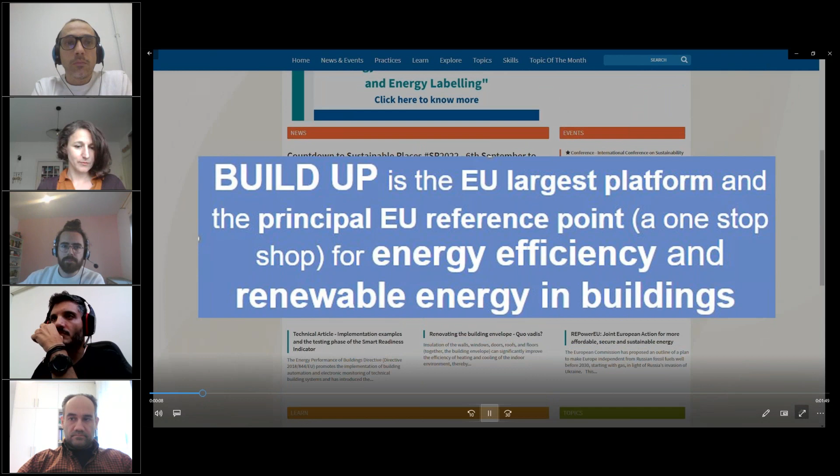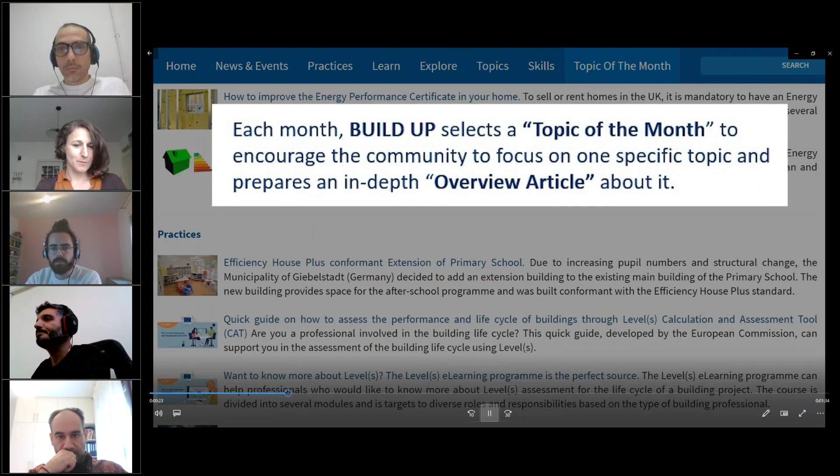BuildUp is Europe's largest international portal for energy efficiency and renewable energy in buildings. It is a unique community that provides the opportunity to discuss, contribute, and collaborate with other experts in this field. BuildUp aims to bring together stakeholders working in the building sector to reap collective intelligence about energy reduction by encouraging knowledge exchange. Our editorial work is organized around the topic of the month, which allows us to go deeper into a specific theme. Each month, several items are produced as overview and technical articles and infographics, but not exclusively.

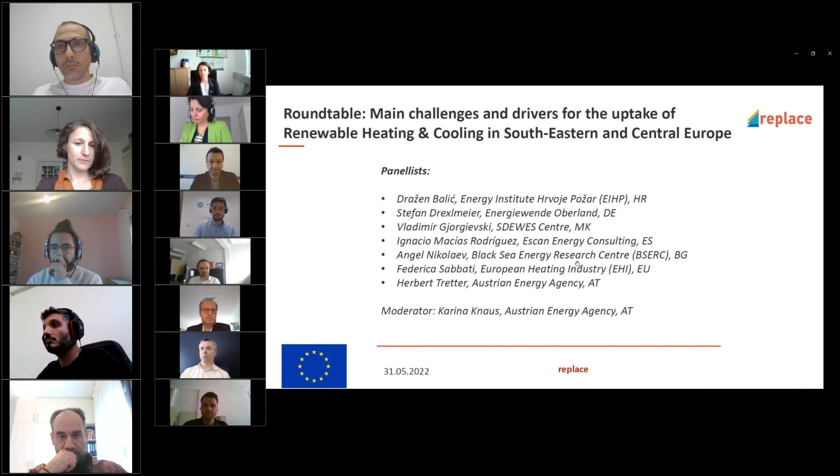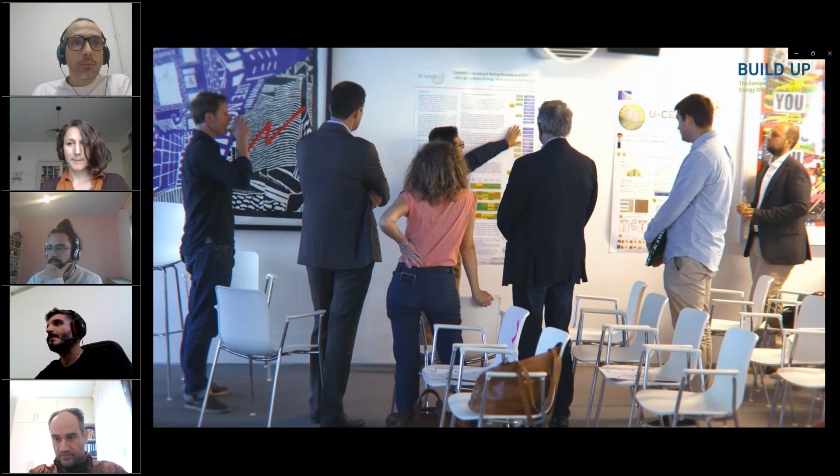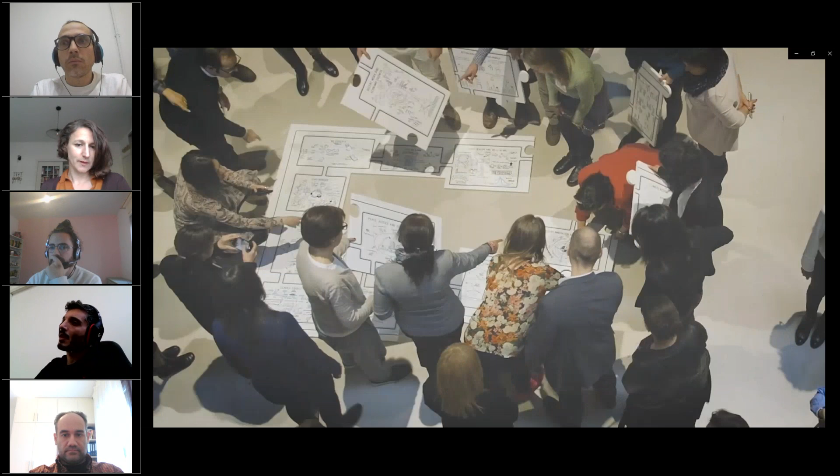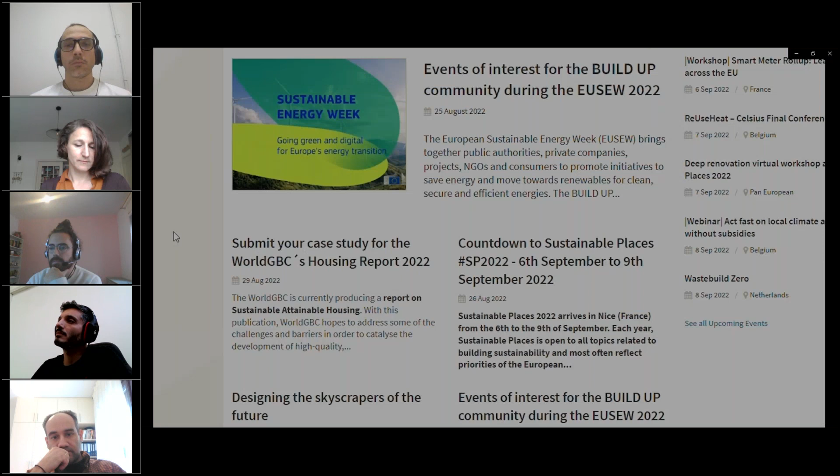BuildUp also offers the opportunity to host webinars on all the topics related to energy efficiency. More recently, BuildUp has opened the opportunity to distinguished experts in the field to share their knowledge in front of our cameras in the BuildUp Expert Talks. BuildUp portal shares daily the most relevant events in the field of energy efficiency and renewable energy, but also participates actively in many European events around the year as EPB Center and REHVA conferences, Horizon 2020, Interreg, and COST Action events, Covenant of Mayors, and much more, with the aim of further disseminating the results and helping to create high-quality media content. BuildUp content is updated daily, reaching around 120 items each month.

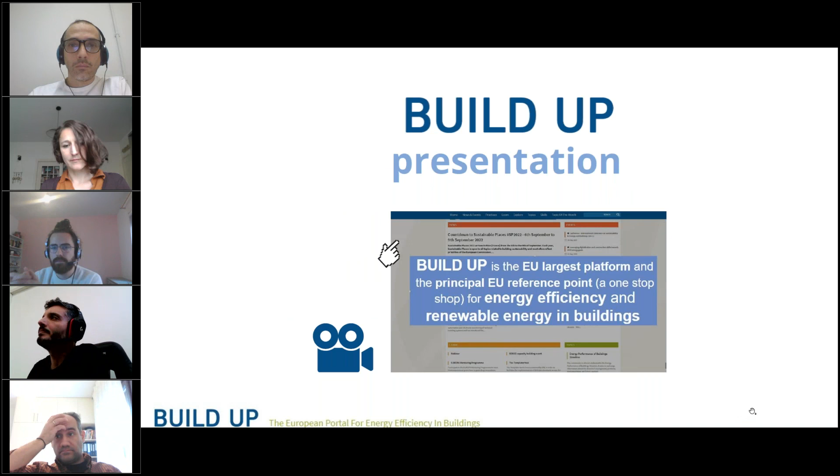It is a pleasure to host today's webinar entitled The Plug-n-Harvest Solution Enabling Smart Energy Renovations for Different Building Cases, which is organized by the Plug-n-Harvest project. In today's agenda, Dr. Iakovos Michailidis, electrical engineer and technical manager of Plug-n-Harvest at Center for Research and Technology Hellas, CERTH, will present the plug-and-play passive and active multimodal energy harvesting systems, circular economy by design with high replicability for self-sufficient districts near zero buildings. Tony Gerena, business and energy analyst at IWASOL, will present the circular economy aspects of the design. Neil Juvanteni, industrial engineer at Housing Agency of Catalonia, will present the pilot case 3, that is the Sant Quirze residential building in Catalonia, in Spain.

The final presentation will be from Dr. Nikolaos Margaritis, mechanical engineer and project manager at Center for Research and Technology Hellas. He will present the pilot case 4, that is the RWM Grevena tertiary building in Greece. The audience is welcome to send us questions through the platform. These questions will be answered at the end of the presentations in a session moderated by Susanna Prochaskova, Innovation Architect at Pitch Architects. I leave the floor now to our first speaker, Dr. Iakovos Michailidis, who will present the Plug-n-Harvest project. Thank you very much and enjoy.

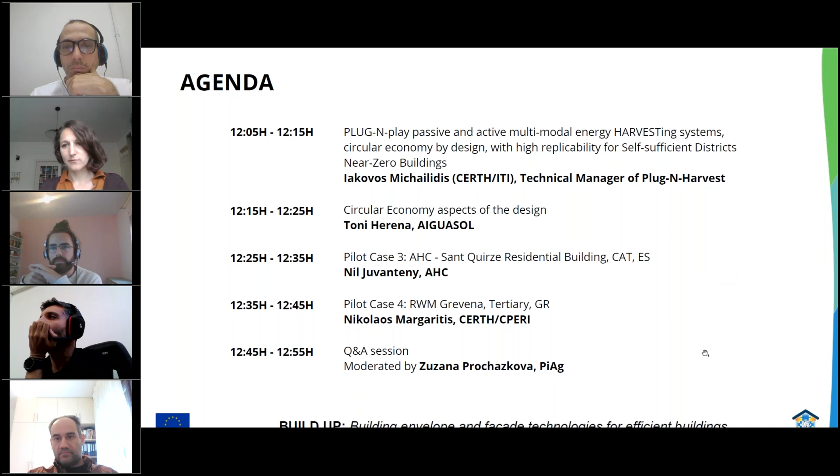So my name is Iakovos Michailidis. I'm a postdoctoral research associate in the Information Technologies Institute, which is under the Center for Research and Technology Hellas. And CERTH is the coordinator of the project, and I'm mainly involved in the technical management of the project itself. I will do the introductory part to present the general idea of the project, and then we will move on with my colleagues and the next speakers.

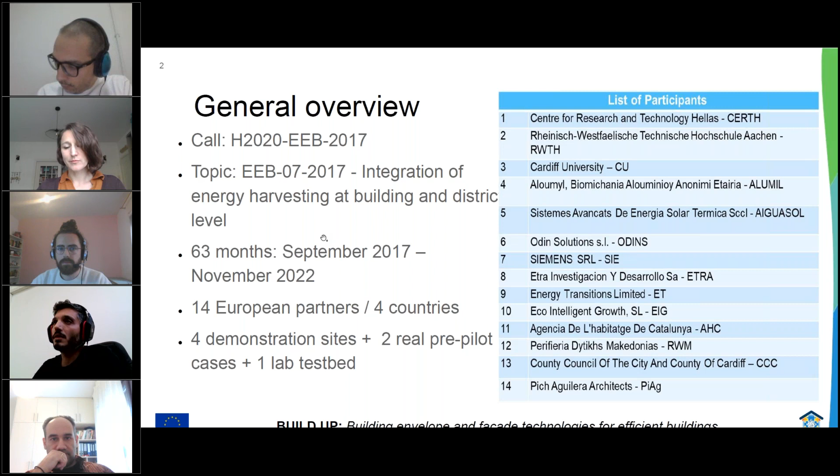So, as a general overview, Plug-n-Harvest is a Horizon 2020 project funded under Energy Efficiency in Buildings 07-2017 topic. It started actually in September 2017. It went through COVID and eventually managed to complete and finish in November 2022, actually quite a few weeks ago. The consortium consists of 14 partners coming from 4 EU countries.

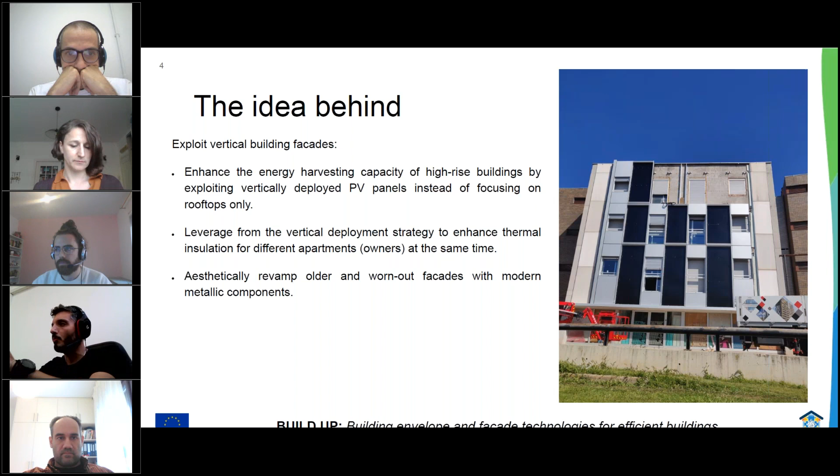The main objective now of the project, moving on from the idea, is to develop a modular smart facade system that can be easily adapted to the different building cases and requirements to move them one step closer to energy neutrality. The facade system should be able to ensure low installation costs.

These are the goals of the project. Circularity through reusable parts, components and elements. Energy harvesting through PVs, as an example, and structural resiliency through innovative aluminum profiles, which are able to withstand much heavier technology loads than conventional ones, which may host only, for example, panels.

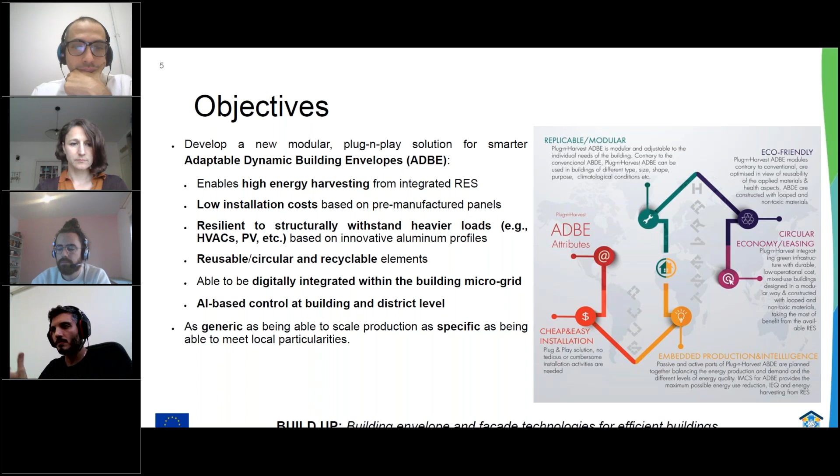Moreover, since conventional insulation and technology infrastructure elements are not capable of guaranteeing energy efficiency on their own, smart ICT solutions are necessary to manage controllable elements appropriately. So the first pillar is the modular facade, and the second pillar is the intelligence part, the AI part. Plug-n-Harvest tries to marry these two in order to provide capacity to the building and exploit the capacity that is installed on the building through AI.

Now, the quantified goals of the project. It's to ensure installation costs 20% less than conventional energy retrofitting solutions when in production scale, of course, not as a prototype. Reduce energy bills up to 30%, maximize exploitation of locally harvested energy up to 80%, and of course, ensure the acceptance of end users by over 90%.

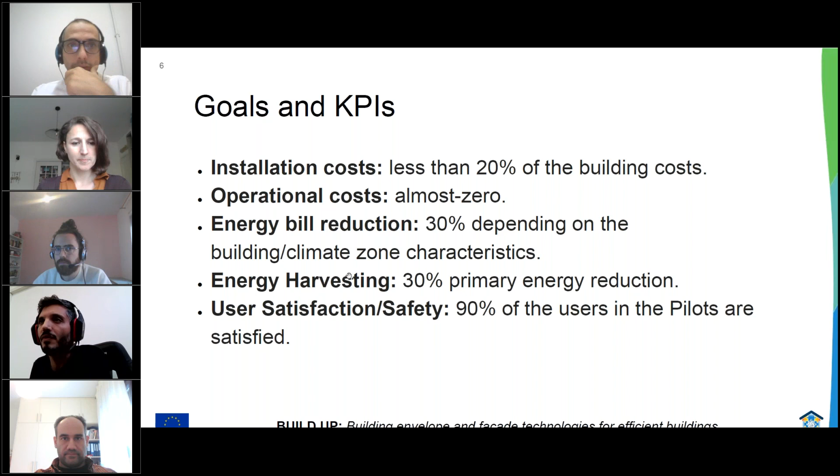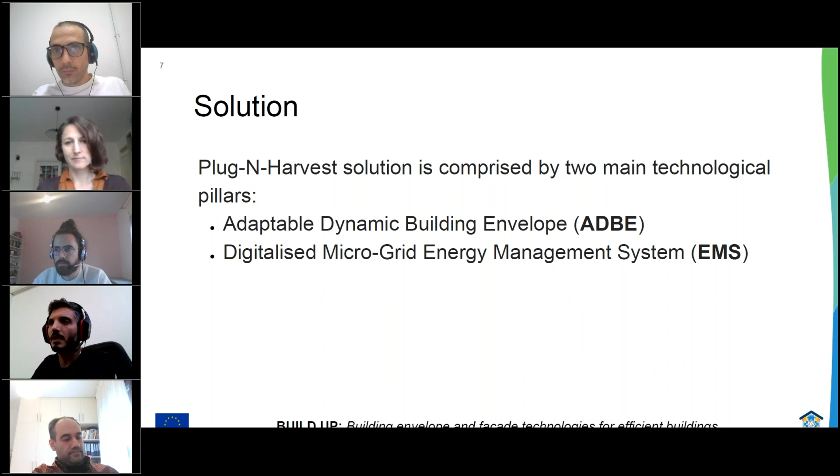As implied already, the Plug-n-Harvest solution consists of two main pillars: the facade and the digitalized part, the AI part. The facade part has been designed to host detachable aluminum panels that can be easily configured to integrate both passive insulation materials, like stone wool, as well as active technology elements for energy harvesting and demand reduction, like PV panels or even HVACs or heat recovery systems, as an idea.

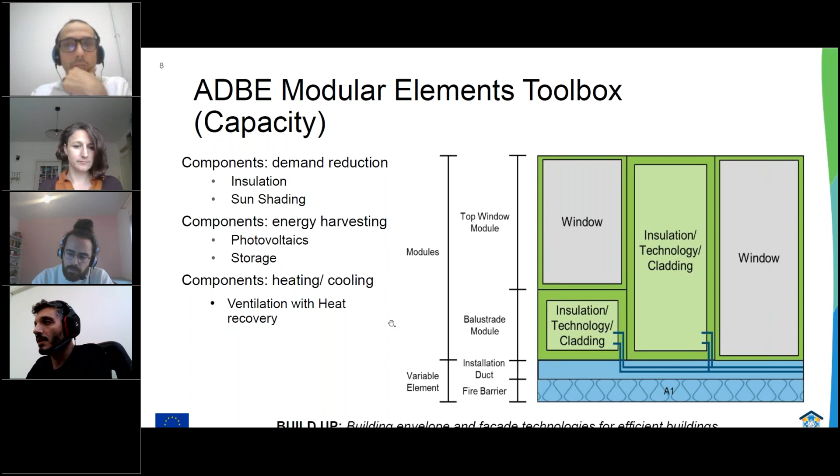About the ICT part now, the second pillar of the project. It's comprised of an ecosystem of different tools. On your right-hand side, you may consider the building itself, coupled with the ADBE facade. Now starts the digital part. We have the sensors and the actuators that allow us to control the facade together with the other available loads, the existing loads of the building, of the microgrid.

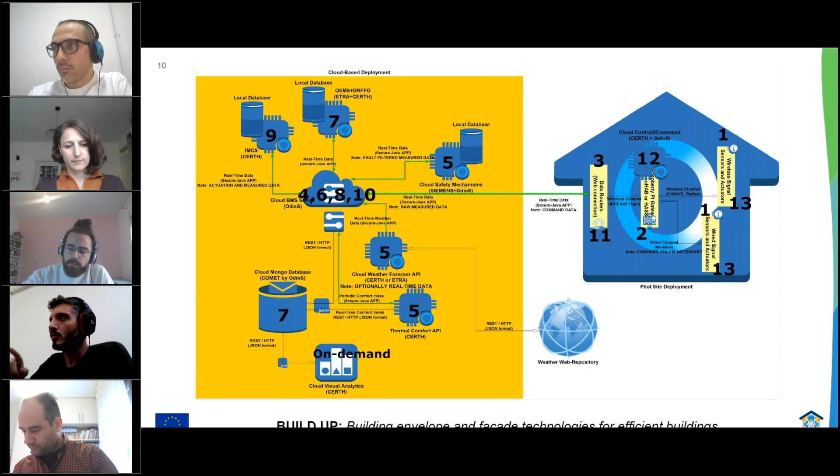Then we move on to flexibility forecasting at the district scale, and eventually there is the heart, the core ingredient of the ICT ecosystem, the energy management tool, the intelligent management and control system, which takes into account the flexibility forecasting as well as the curated data in order to generate optimized control decisions and actuation signals for the building and the microgrid controllable loads to close the control loop.

Now, to conclude, Plug-n-Harvest includes real-life experimenting with 2 pre-pilot sites, one in Thessaloniki, Greece, at CERTH, and another at Cardiff University in Wales. And 4 real-life large-scale demonstration sites.

2 of them are residential: a multi-family building in St. Quirze, Barcelona, Spain, and 2 single-family houses in Cardiff, Wales. The other 2 are tertiary office buildings, one in the Region of Western Macedonia in Grevena, Greece, and the last one on the RWTH Aachen University campus in Germany.

Today we will focus on the outcomes from the Plug-n-Harvest solution implementation in the 2 largest pilot cases, the one in Spain and the one in Greece. However, before that, I give the floor to my colleague, Tony Herena from Aiguasol, who will present the circularity aspects that we considered for the project designs and solutions.

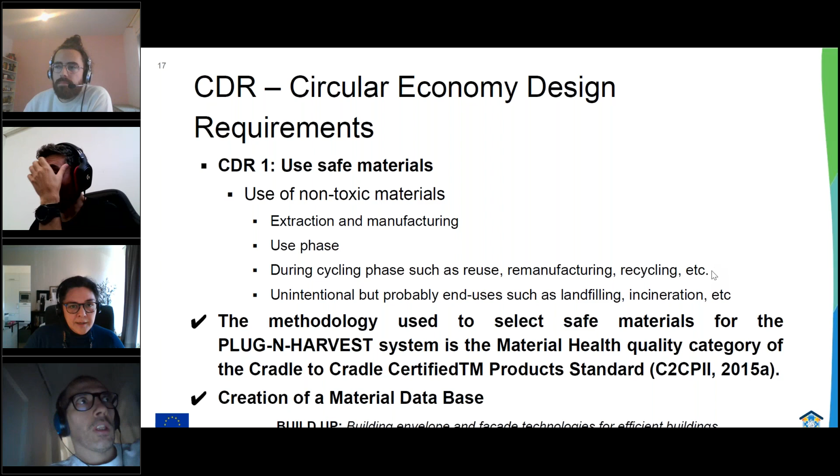Hello? Tony, I think we have lost your connection. Tony, if you'd like to help your connection, just disable your camera to save some bandwidth. Your connection is a little bit weak, and we have not heard you. Do you hear us? Do you hear us, Tony? If you are having any troubles, we can pass to Neil. Exactly. Maria, could you pass the controls to Neil while Tony searches for a better place? Yes, hello.

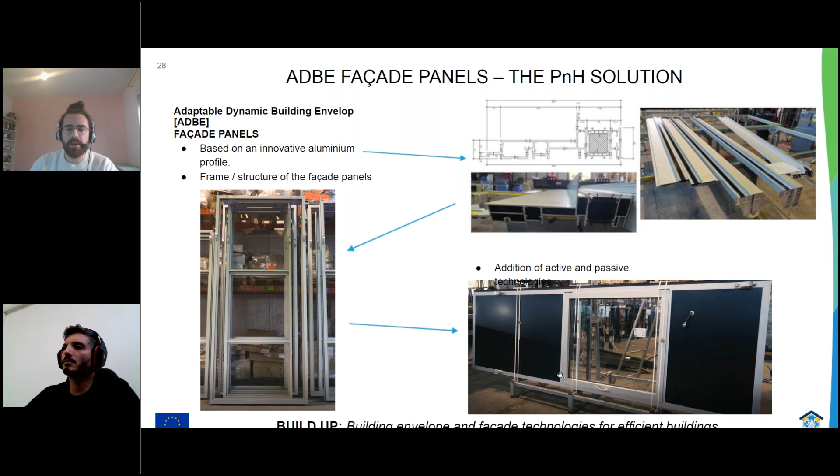Finally, from those profiles, we construct the frame or the structure of the panels, and from that we can add several active or passive technologies to the profile in order to get the final result. In the case of St. Quirze, we have incorporated several passive and active technologies.

In this case, we have 10 centimeters of thermal insulation of mineral wool. We have also installed new high-performance windows, which include aluminum frame with thermal bridge break, double glazed windows with argon gas gap in the middle, and shutters of anodized aluminum. Then we have also incorporated photovoltaic panels, which are tailored ones. And finally, in the areas where there are no windows and no PVs, we have installed aluminum cladding.

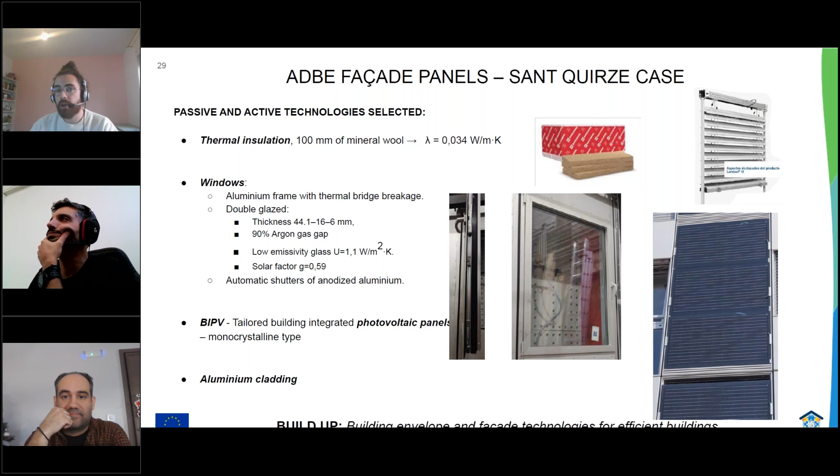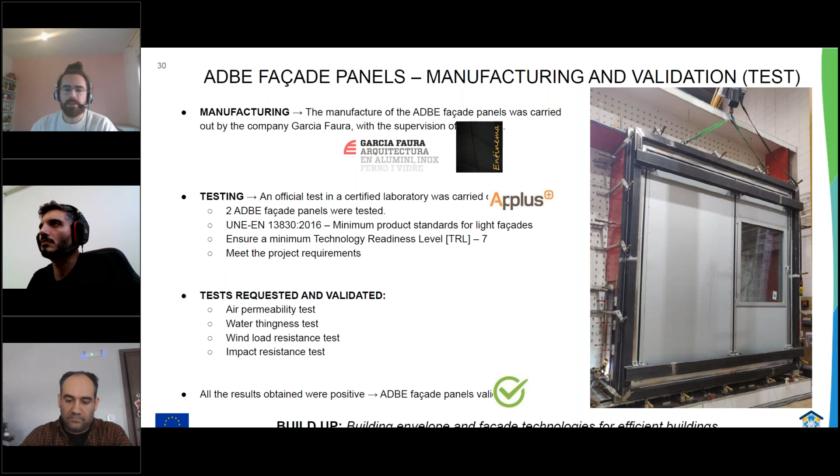In St. Quirze, we have installed a total of 21 ADBE facade panels. These were divided in 3 rows and 7 columns, and we have 3 different types of panels. The first one is what we call a single ADBE panel, because the panel is made of PV. Then we have the double ADBE panel, which has 2 different parts. In the lower part, there is a window, and in the upper part, there is aluminum cladding. And finally, the triple one, because in the upper and lower parts there is aluminum cladding, while in the middle there is a window. We have 9 units of the single panel and 6 units of both the double and triple ones.

Okay, let's go now through the renovation and the works done on site, especially focusing on the execution times, because reducing them was one of the objectives of the project. So the renovation started in March and lasted until May of this year, having a duration of less than 2 months. We have divided the whole process in 4 general steps in order to simplify it. The first one was obviously the dismantling of the existing facade, because it was not possible to install the panels over the ventilated facade. And this had a duration of 7 working days. In the picture, you can see the process of dismantling.

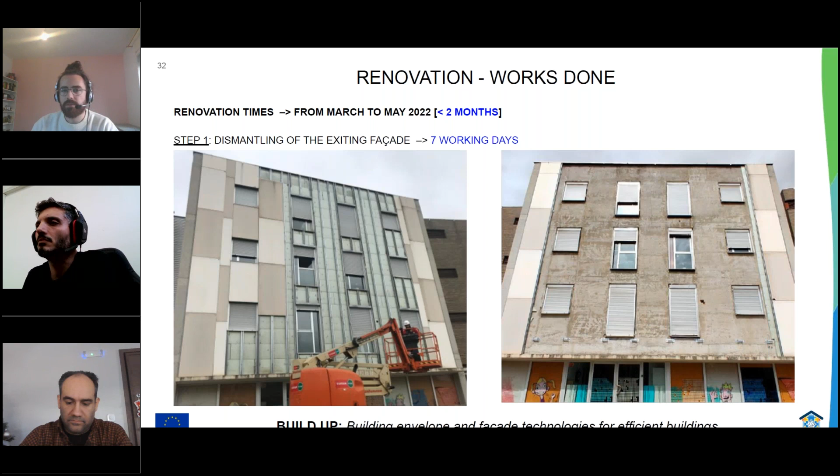Then the second step, with all the preparation works for the installation of the ADBE facade panels. These works were, for example, to install the anchoring system, to install the fire protection elements, to install an acoustic isolation band, or to drill the main wall in order to pass the wires of the automatic shutters, among others. All these works lasted 12 working days.

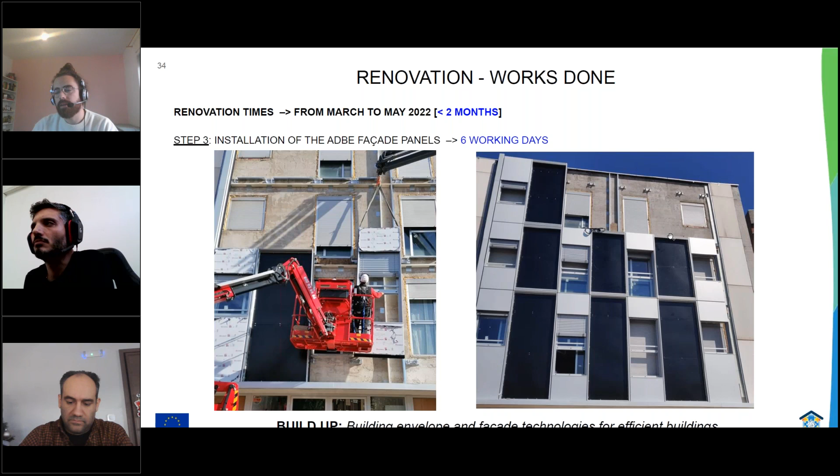And then, once the facade was prepared, we did the installation of the ADBE facade panels. It was very fast because it took just 6 working days, which, considering that we have 21 ADBE facade panels, is between 3 and 4 panels per day. And also, as you can see, there was no need for any type of scaffolding, and all the installation was done only with a lifting basket and a crane. Here you have the pictures. We started from the lower left corner, and the last one was the one in the upper right corner.

And finally, after the installation, the last step was the dismantling of the existing windows from the interior, and then some finishing works. These works took another 7 working days, and were, among others, to finish the internal frame of the windows, to seal some joints, the completion of the electrical circuit for the automatic shutters, and to finish the lateral or the crowning of the facade from the exterior.

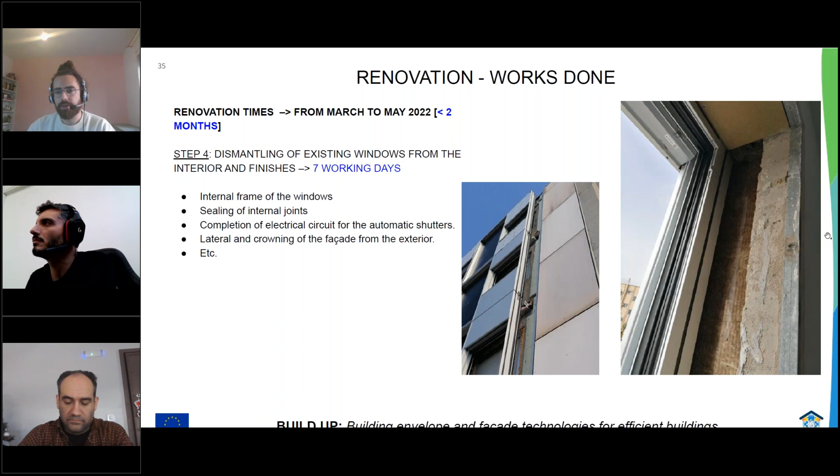About the PV system, we have installed 33 glasses within the 9 single ADBE panels that I have shown you, and the total peak power installed is 5.38 kilowatts peak. We have used an inverter of the brand Solis, and the nominal power is 6 kilowatts nominal. The system has been started up and legalized just 1 week ago. And the production is shared equally among all the dwellings, and the surplus of production, which is not consumed in the building, is injected to the grid and compensated through the electricity bills of the tenants.

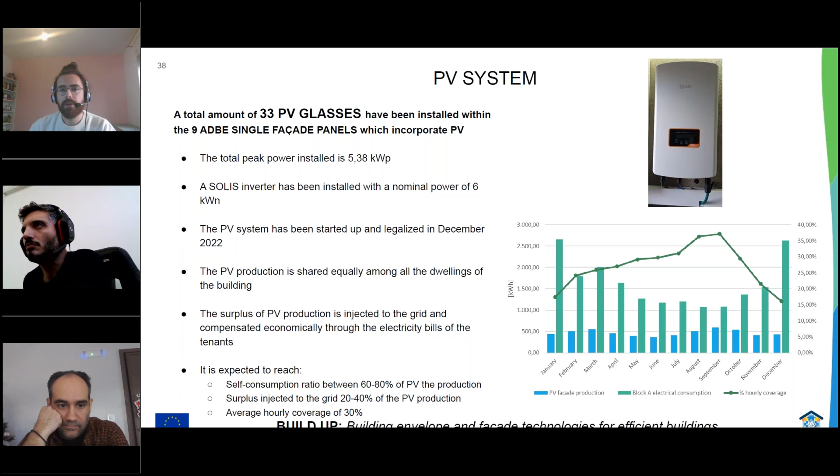As I said, we don't have enough real data yet, but it is expected to reach a self-consumption ratio between 60 and 80% of the PV production, which means that between 60 and 80% of the production will be consumed directly in the building, and the rest, the surplus, between 20 and 40%, will be injected to the grid and compensated. The average hourly coverage is expected to be around 30%, which means that of the total electricity consumption of the building in every hour, more or less 30% will be produced thanks to the PV system.

We have also incorporated PV, and thanks to that, as I have already said, we expect a 30% reduction of the electricity consumption from the grid, and also a 30% reduction of the non-renewable primary energy in the building. Also, there will be extra economic savings from surplus compensation through electricity bills. We have also been able to shorten the renovation time. We have taken advantage of the circular economy benefits that hopefully Tony will explain now.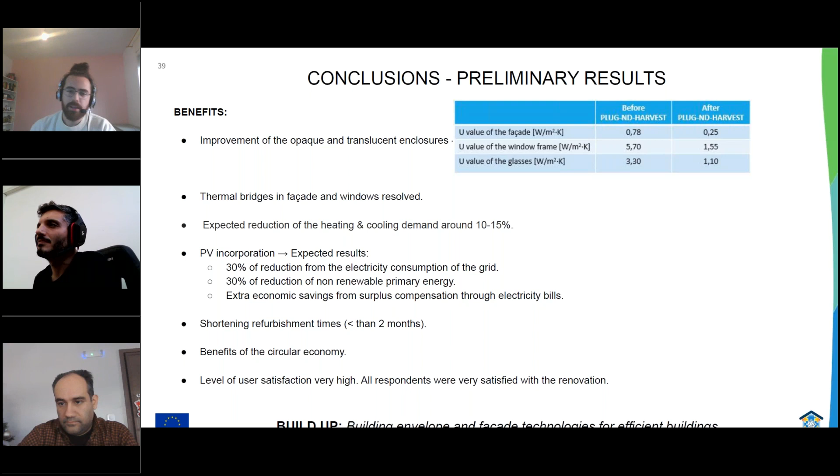And finally, we have done several surveys to the users in order to evaluate the degree of satisfaction. I have to say that the users are really satisfied. The level of satisfaction is very high. So is ours. So thank you very much for that.

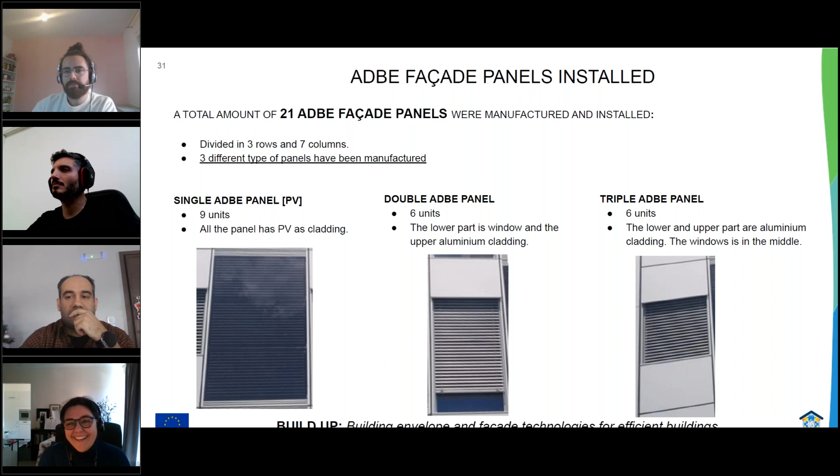Thank you so much for this detailed and pertinent description of the case study and the outcomes. That is, I think, what our audience is more interested in. We go back to Tony Erena. Hope you hear us. Perhaps you don't put the camera, just in case. Do whatever you feel better, and go back to understand the circular economy aspects of this design. The floor is yours. Thank you.

Okay, can you hear me now? Yes, absolutely. Okay, thank you very much. Sorry, sorry for what happened. I don't know if I can pass again the... It seems that yes. Okay, so this was already explained. Okay, so we will make this our back point.

So our goal in this Plug-n-Harvest was to design a modular ADBE solution. Maybe it was fine that Neil presented the visual solution of the ADBE, and then we come back to the circular economy or circular design benefits, because you already have that visual aspect of the final product that we are developing in Plug-n-Harvest. So our main goal was to design a modular ADBE solution, and to have it implemented, as Jacobo says, in 6 pilots, 4 pilots and 2 pre-pilots, with the idea of a product that could be easily produced and manufactured in the factories, and then transported to the site, as Neil says, and installed on the facade in a very short time period.

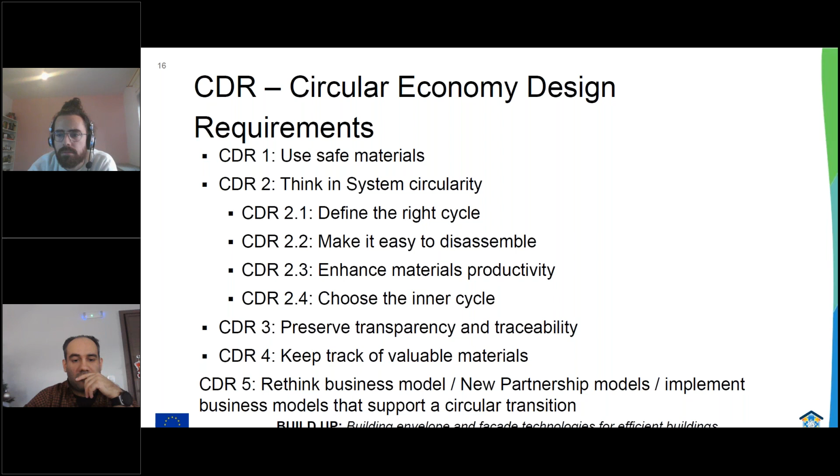I'm still there. Okay, so I cannot change the slide. We see your slide. Yeah, I want to change it, but I can't. If you could pass my slide, please. Okay, sorry, there is some delay in the connection, so we have passed several slides. We are on the evaluation methodology and impact assessment of circular economy solutions. Well, now it's changing, wait a moment. Okay, sorry, because it's changing slides

in a mad way. The evaluation methodology and impact assessment of circular economy solutions was one of the goals of this project, and it is based on a life cycle concept. You are using all the stages of the product, not just the operational one, ensuring that you are using the best options for the product stage, but also for the operational use and the end of life stage. What this evaluation methodology tries to do is to quantify the circular flow that is included in every vector.

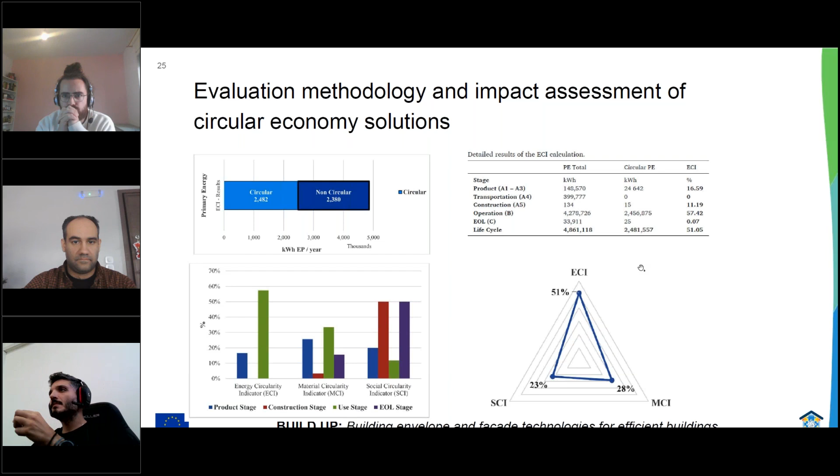So this is all. I think I have missed some slides, but it's going too slow for me, so I cannot understand which slide I am on right now. What I'm seeing now is pilot case 3.

Yes. Sorry for your connection, Tony. These things happen, but thank you so much, because in any case you brought some of the current keywords, such as circularity, replicability, modularity, into the discussion. So it was really interesting to listen to it.

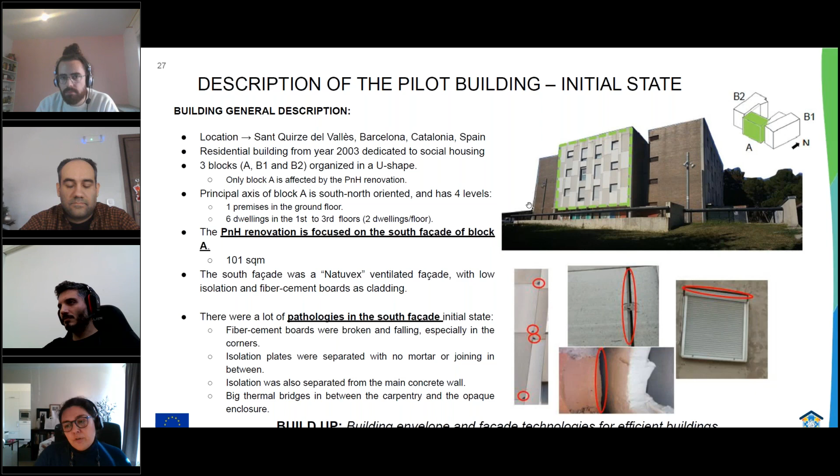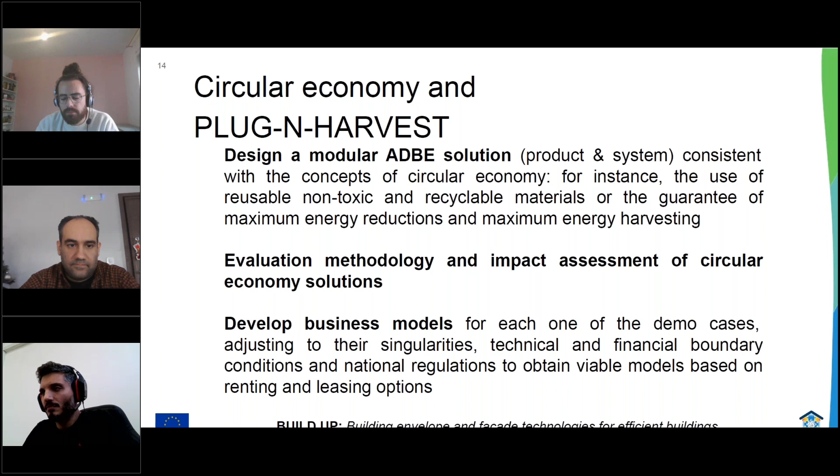If you want, if you can change the slides for me. Sure, I can. Daniel, can you go back? If you can recover the controls, just work them for him, please. If we can go back to the initial one, I can go through to slide 14. Daniel. Yeah, there you go. Okay. Advance. One more forward, Danny. One more. One more.

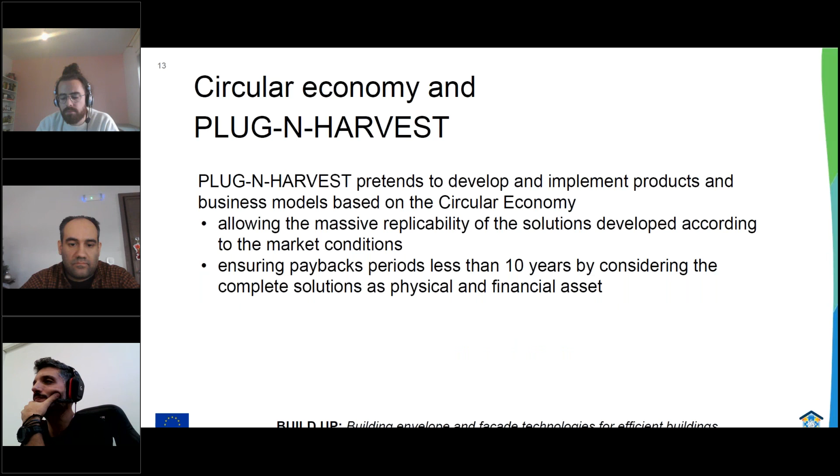To the front. So we are in the circular economy aspect. No, to the front. To the front. Advance, please. Advance. Advance. Advance. Forward.

Okay, so the CDR, these are the circular economy design requirements. First one, we use a material database developed inside the project in order to select the best materials. When I say the best material, it is not the cheapest, but the more reusable, the safer from a health point of view, the more recycled, and the one with the least quantity of embodied carbon. So inside the project, we created a circular material database, and we work with the providers in order to select the best materials for this ADBE solution. Go on, please.

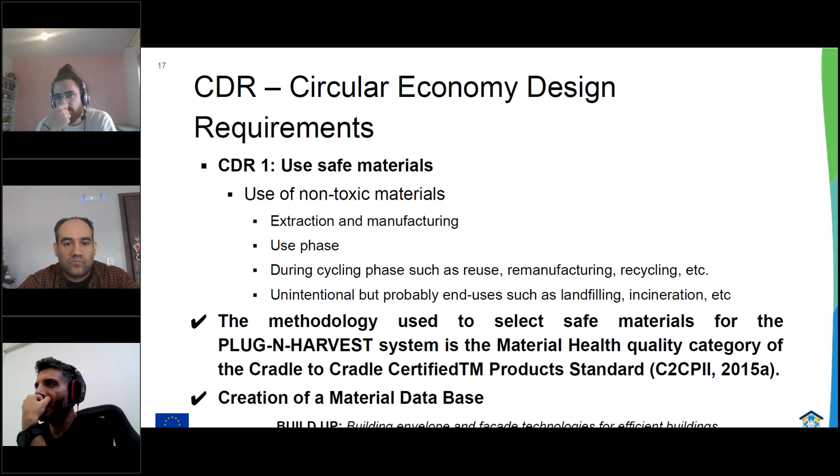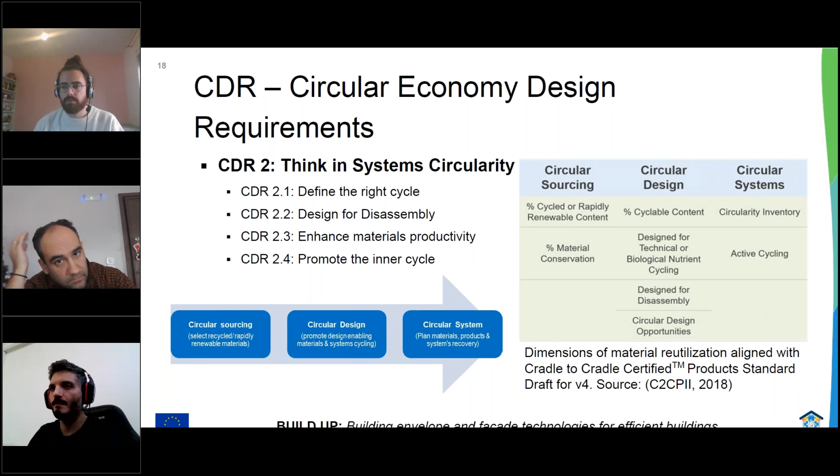Okay, then another aspect is to keep track during the whole life cycle, in order to have the maximum quantity of information. And when anybody outside of this cycle wants to have insight into this material or this product, they could have all the information they need to extract the materials, to repair, to maintain this product. So it is very important to have a system of traceability, a system of tracking with all the information that is possible. Go on.

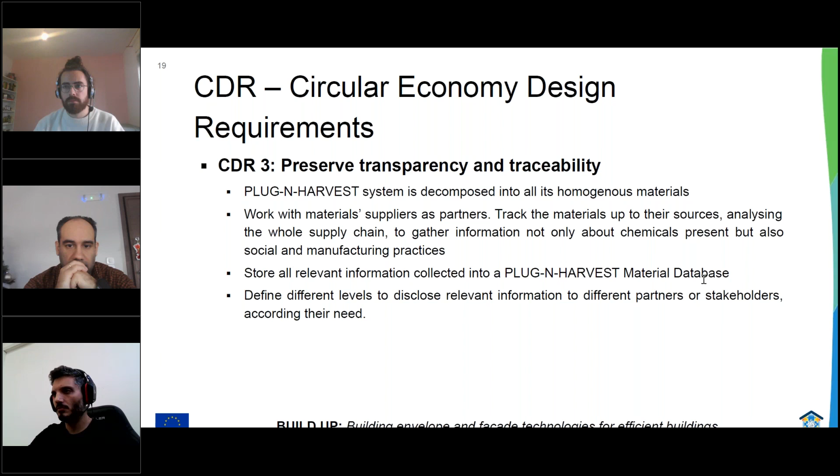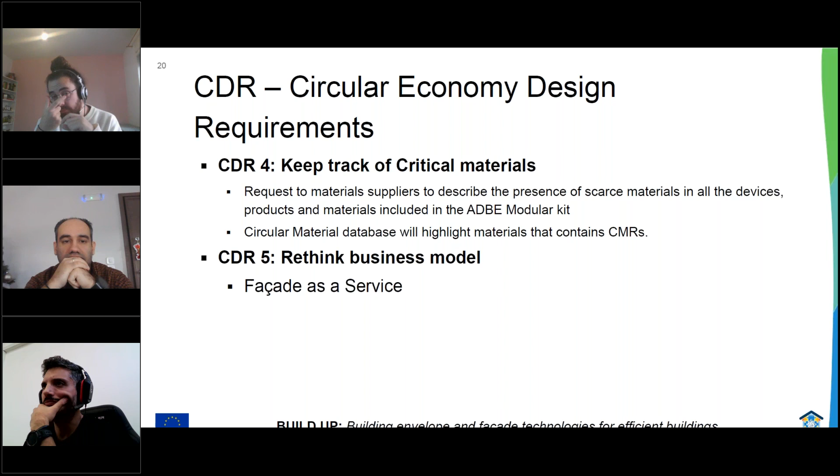Yes, and then the last is the rethink business model. We developed and worked with a facade as a service, in which the property is not with the tenants, the inhabitants, the users, but they pay for this facade as a service in order to have the best performance and the best maintenance for this facade. So it is a new business model based on long-term guarantees and long-term agreements. Go on, please.

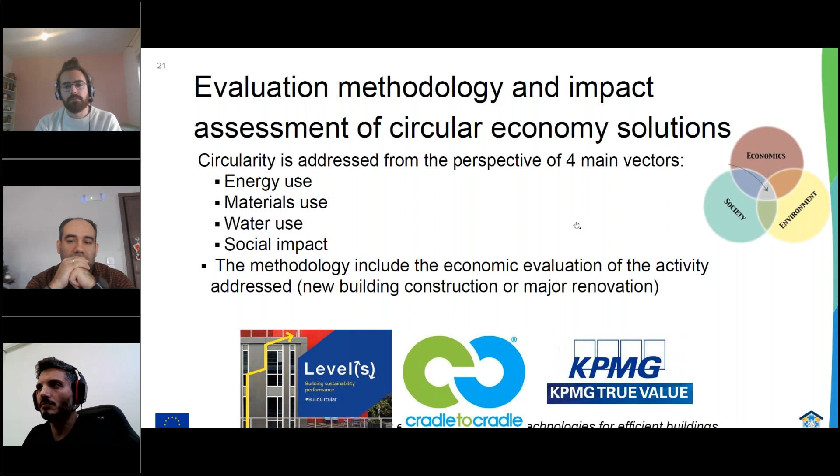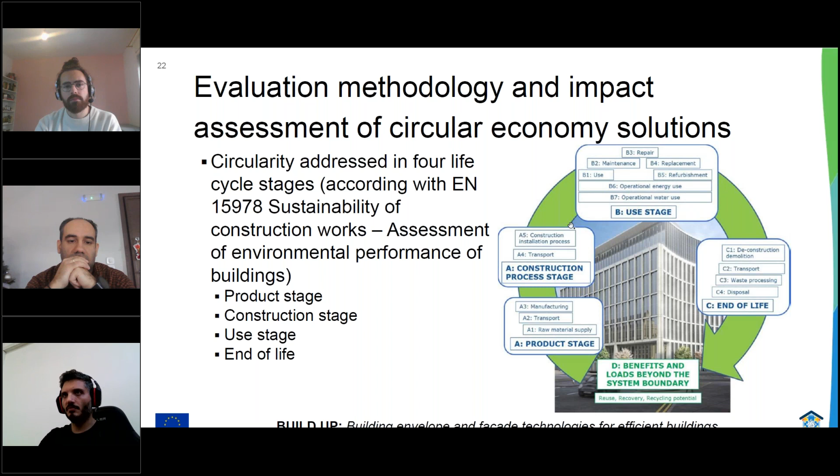Okay, this is what I already explained about the methodology. We have 5 vectors: energy, material, water, social, and the economical one. Go on. This is based on levels. This is based also on the concept of LCA, all the life cycle of the solutions. Go on, please. You can move. Okay, the product stage, the construction stage, the use stage, and the end of life. These are all the stages.

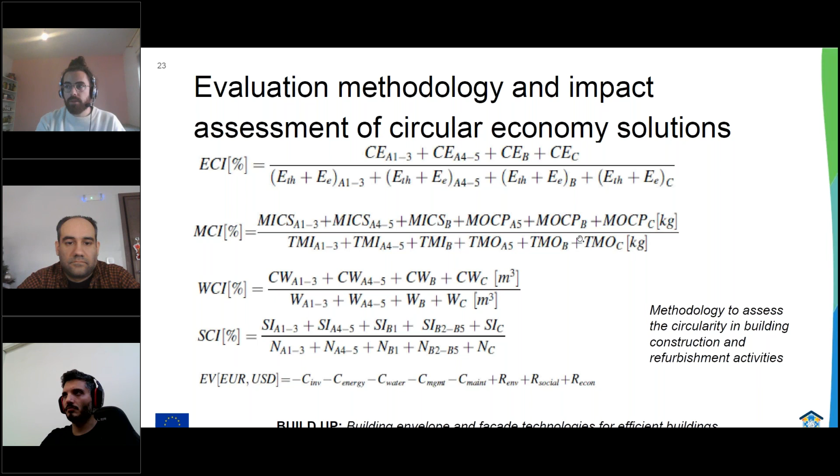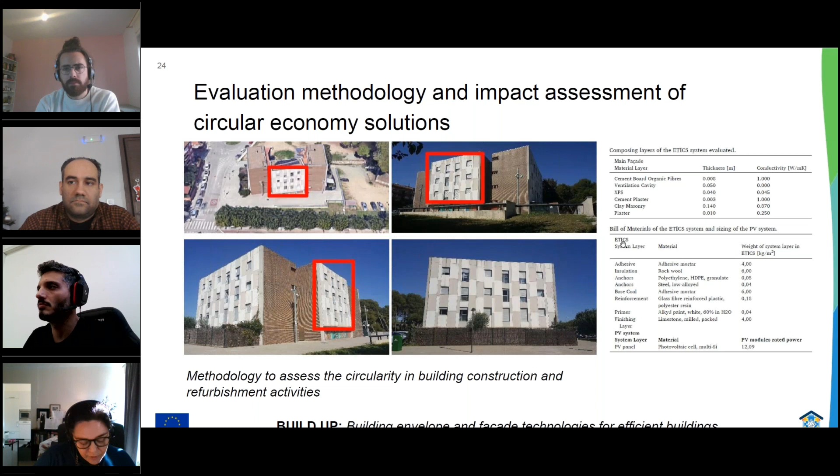So thank you so much, Tony. And we go to the final presentation from Dr. Nikolaos Margaritis, mechanical engineer and project manager at the Center for Research and Technology Hellas, CERTH, who is going to present another pilot case, this one in Greece. The floor is yours. Yes, hello from Greece. My name is Nikos Margaritis. I'm working in CERTH as a research engineer, and I was technical manager for the Greek pilot located in Grevena,

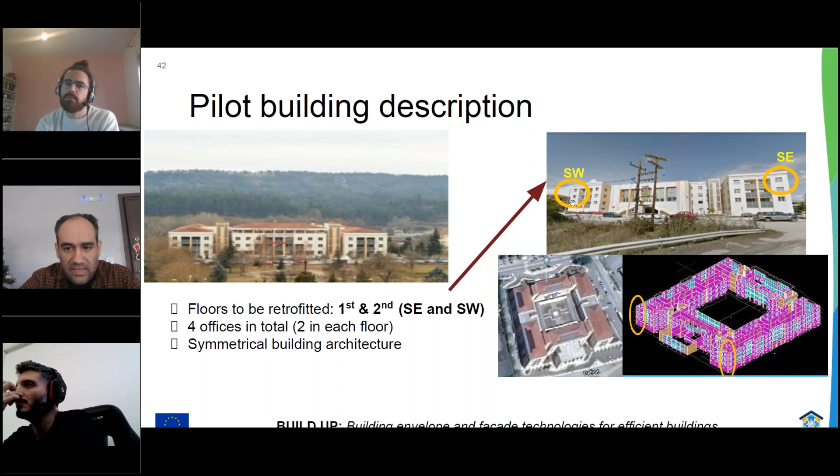north part of Greece. Here we have a building that is hosting offices of the public sector, the regional authorities of Western Macedonia. The floors that were selected to retrofit were the first and second. You see here the circled spots that we selected to renovate. These include 4 offices in total, 2 on each floor. And in the next slide, you can see how the south facade of the building was before the pilot

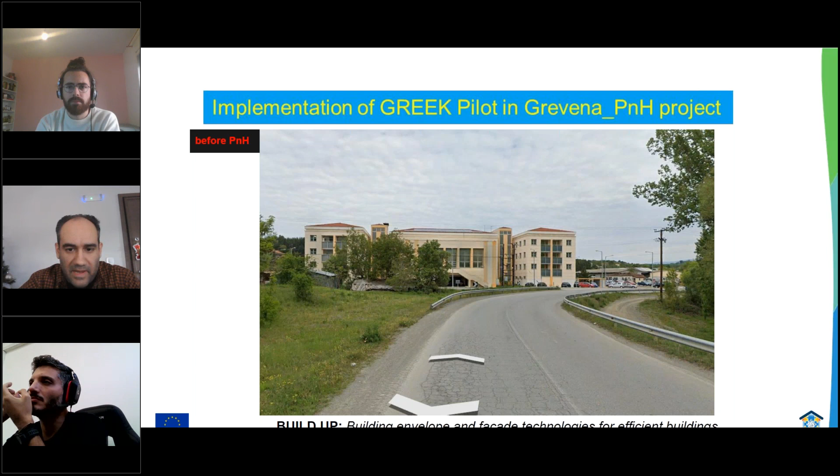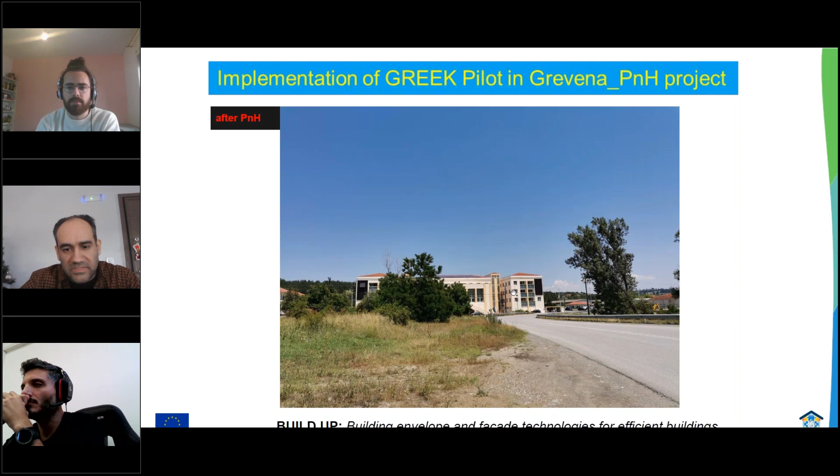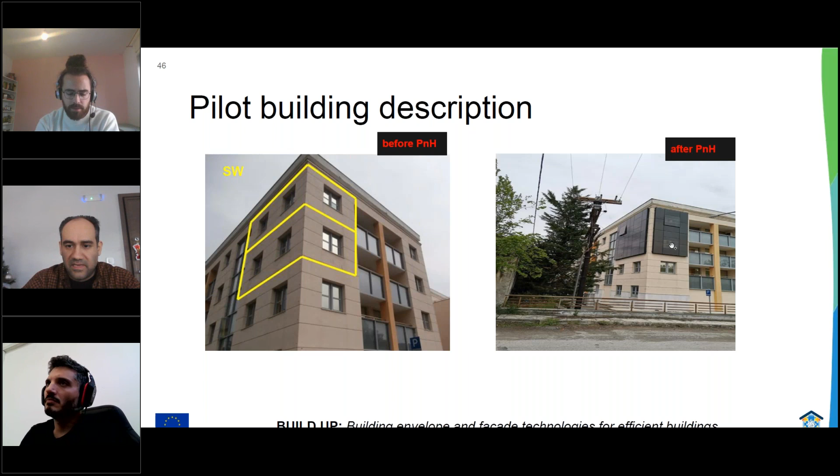installation. And in this photo that you now see, you can see the parts that have been renovated. This is the south, but in the next photo you can see it better. Here is the southeast part of the building, where the BIPV modules were installed. And in the next slide, you can see the southwest side of the building. So we have 2 symmetrical installations of this smart facade in this building.

So during this project, the final technical specifications were exported from us and in cooperation with other partners. Regarding the BIPV facade, it includes aluminum profile designed from Alumil. Finally, we selected 2 modules with these dimensions that were incorporated in the facade.

We're talking about a BIPV system of amorphous silicon material, thin film. In total, we have installed 150 square meters of photovoltaic system with a total power around 8 kilowatts. The supplier was Onyx. It has also 4 inverters and 4 charge controllers for the photovoltaic system, which is autonomous. It is not connected to the grid, but it is used to supply power to these offices of the building. Regarding the storage unit, it includes 24 batteries for 1 day autonomy.

The supplier was Sunlight, and in the base of this system was part of insulation, 3 centimeters of stone wool insulation from Fibran, with a very low thermal conductivity coefficient according to the national regulation for energy efficient buildings.

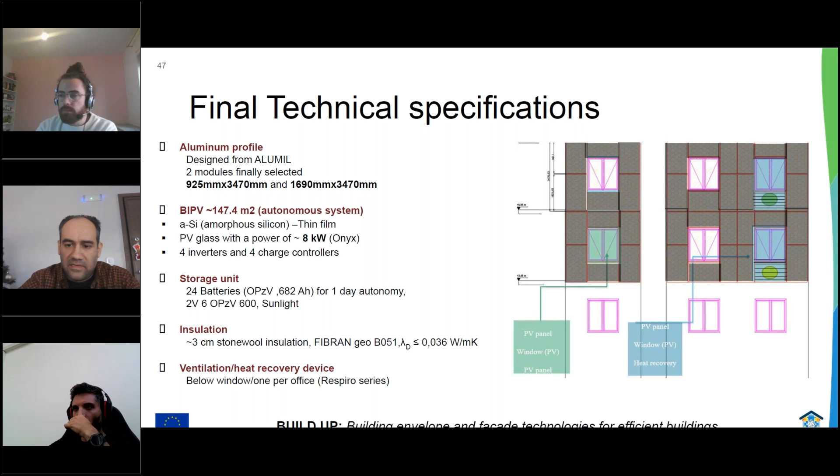And also below each window in each office, a ventilation heat recovery device was installed in order to increase the interior efficiency, the interior, let's say, ambient of the offices, and to increase energy efficiency of the total system.

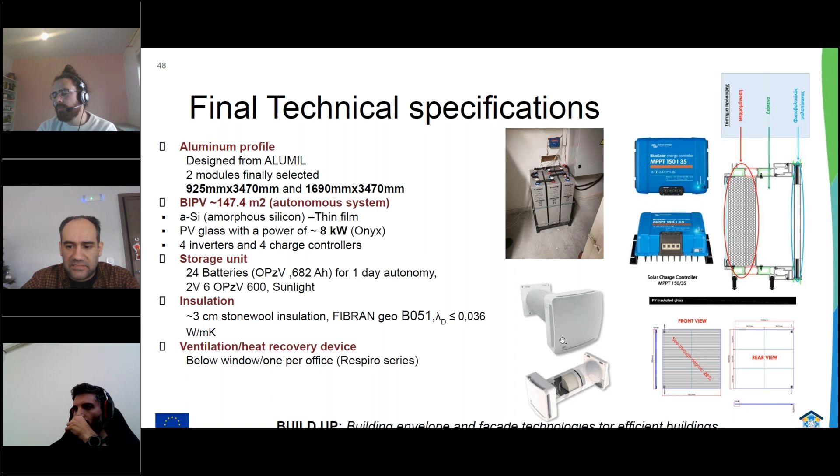Here in the photo, you can see the batteries, the converters, the insulation behind the aluminum profile, the PV Onyx profiles, and the heat recovery system installed in each office. Also, here you can see some photos of the installation of the system.

Renel was the company that was the contractor of this system after a tender procedure that the region of West Macedonia had launched. So the company installed the whole system in around 1 month, checking that all systems are working properly. The installation was ended by April 2022.

The main delay in the whole installation was the delivery of the photovoltaic panels. So this delay caused the installation to be also delayed until April. No big problems emerged during the renovation process, but the most important aspect was the good communication between the PV panel supplier and the integrator of the whole system on site in order to achieve the optimum result.

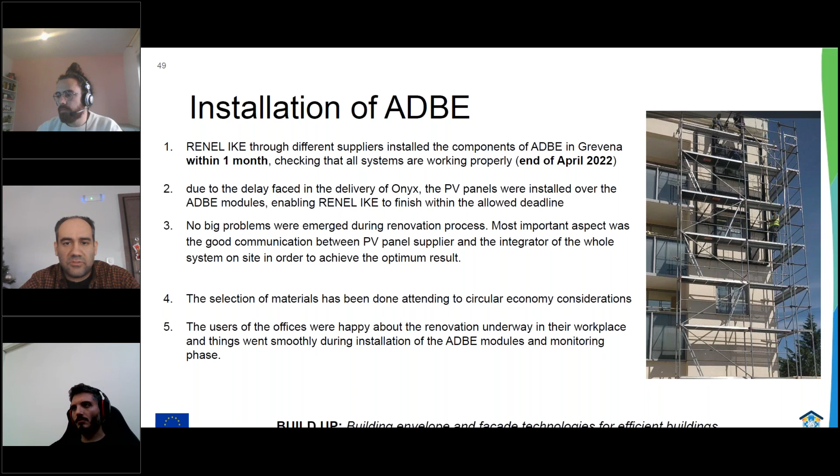The selection of materials has been done according to circular economy considerations, and the users of the offices, from what I can understand, were happy regarding the installation and the renovation of this part of the building. These photos are during the construction.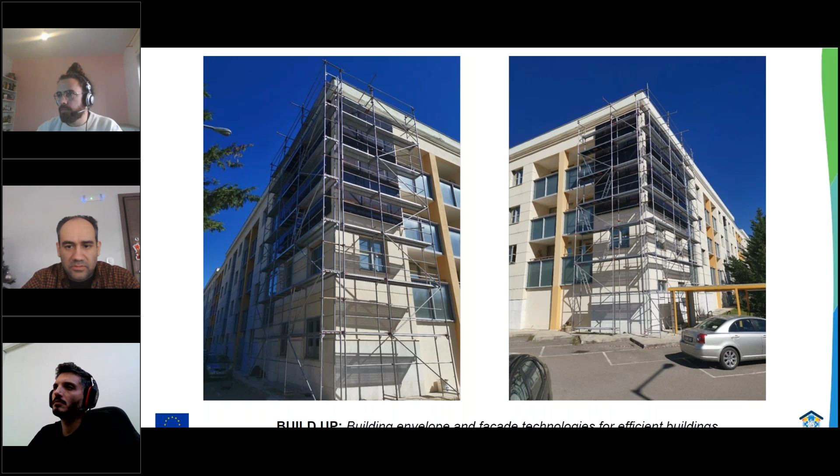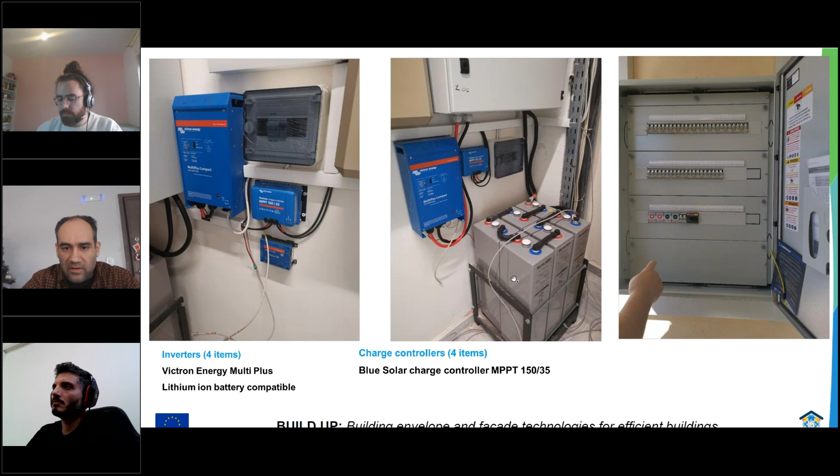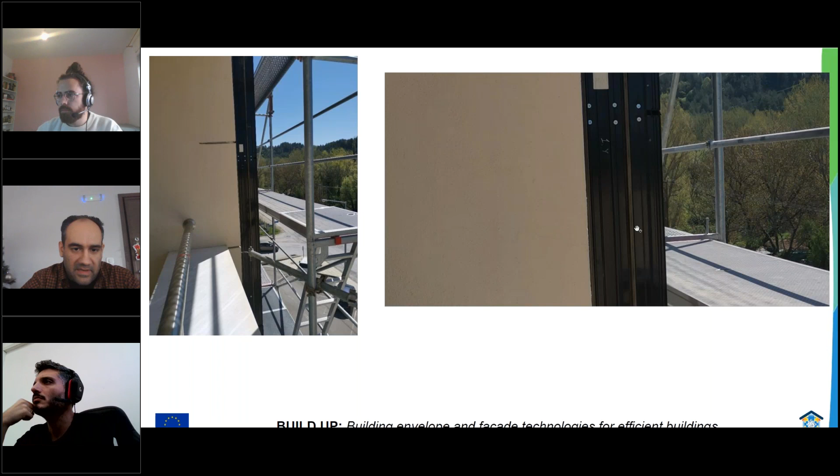Also, I have some photos here of the inverters, Victron Energy Multiplus, and the batteries which were installed in a small room behind the offices. Also, you can see in detail the aluminum and the PV material, and this photo also shows that in each window a separate construction was made in order to be able to control the air in the room.

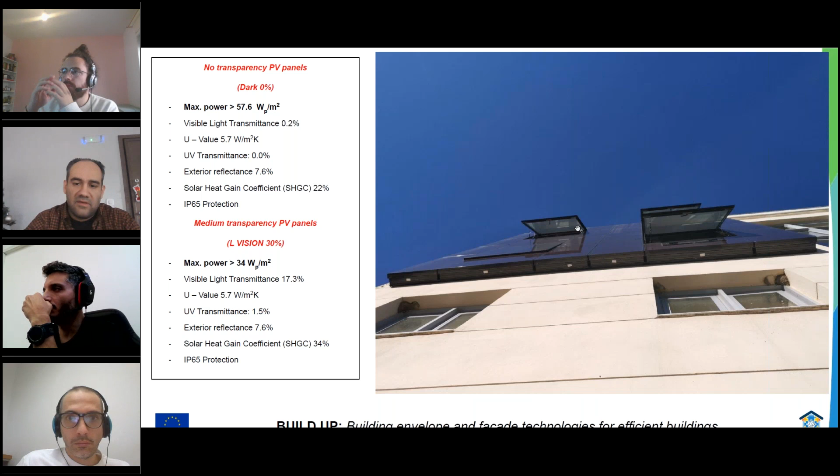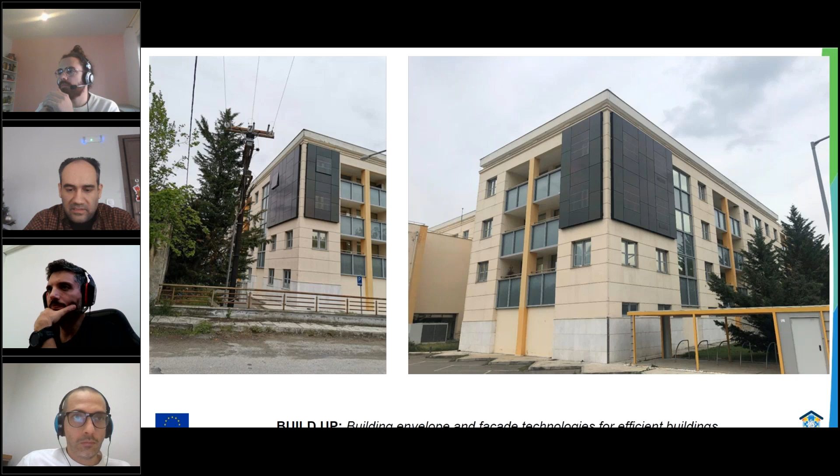So different PV panels were selected. The panels in front of a wall had very dark, non-transparent PV panels, while the panels selected to be installed in front of the windows were selected to have a medium transparency in order not to reduce the light in these offices. This is again the photo of the installed system in the southeast and southwest corner of the building.

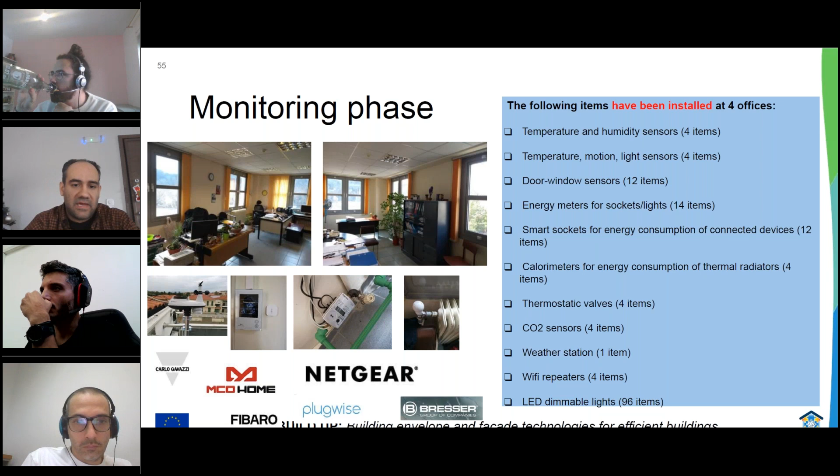Also in these 4 offices were installed monitoring equipment: temperature and humidity sensors, door window sensors, energy meters, smart sockets, calorimeters for energy consumption of thermal radiators, thermostatic valves, CO2 sensors, weather station, and other devices in order to monitor the efficiency of the system before and after the renovation.

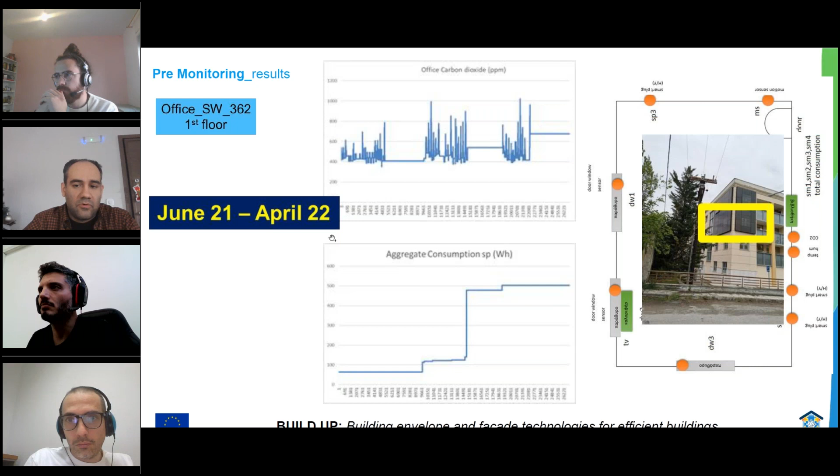So you can see here the results of the signals of monitoring equipment. For example, the office temperature in the first office, the office humidity, carbon dioxide inside the room, and aggregate consumption in this office. The pre-monitoring results were extracted from June 2021 until April 2022. At the end of April 2022, the total system was installed.

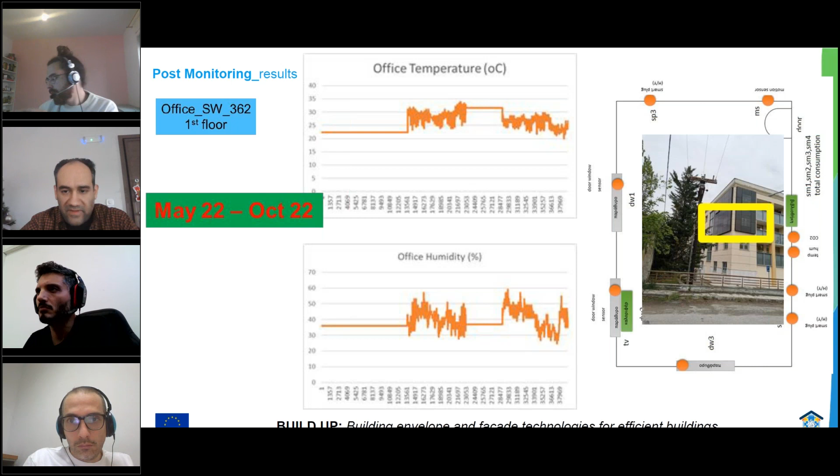So from May until October, until now, let's say, we are in the post-monitoring phase. So again, we measure the same values: temperature, humidity, CO2, consumption, in order to better assess the energy situation of these offices and in general of the building before and after renovation. This measuring campaign is still in progress.

In some months from now, we are going to have a better view of the benefits of this system in the building. And this also will be a step in order to understand how the building would behave if all the facade was renovated with this system. That's all for the Greek pilot.

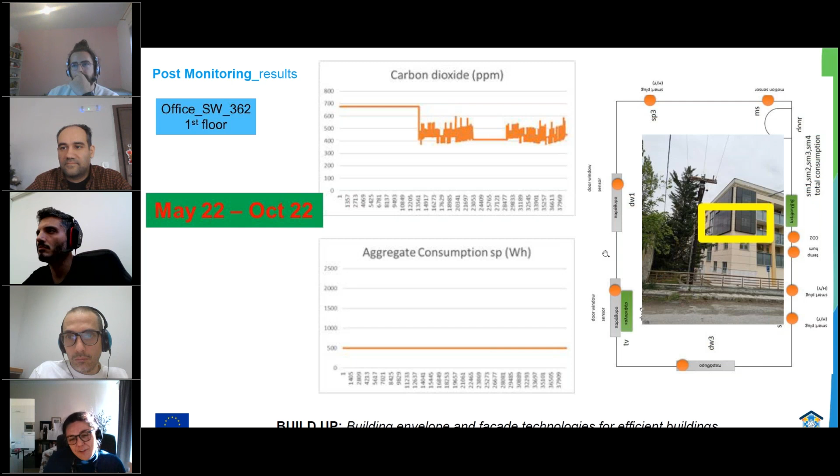Thank you for showing another implementation different to the first one, and also making an impact in the building.